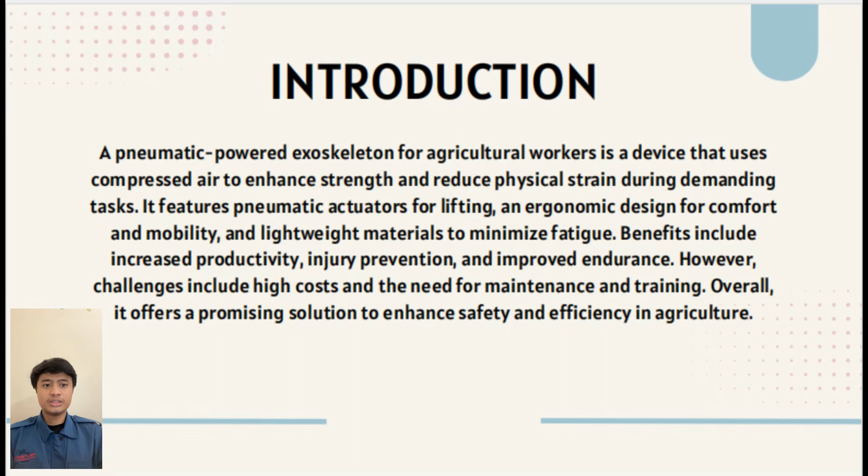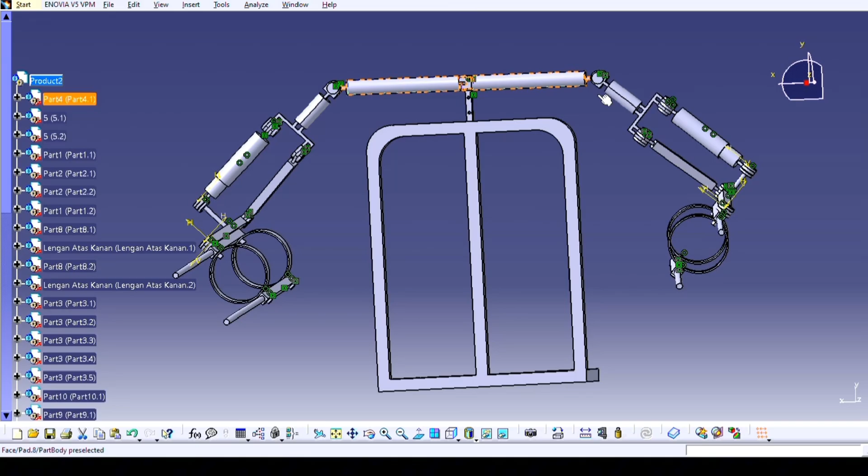Now I want to explain about this pneumatic exoskeleton for the hand. The first part is the top frame, which is the main frame, like this. This is the main frame, and then the second part is this.

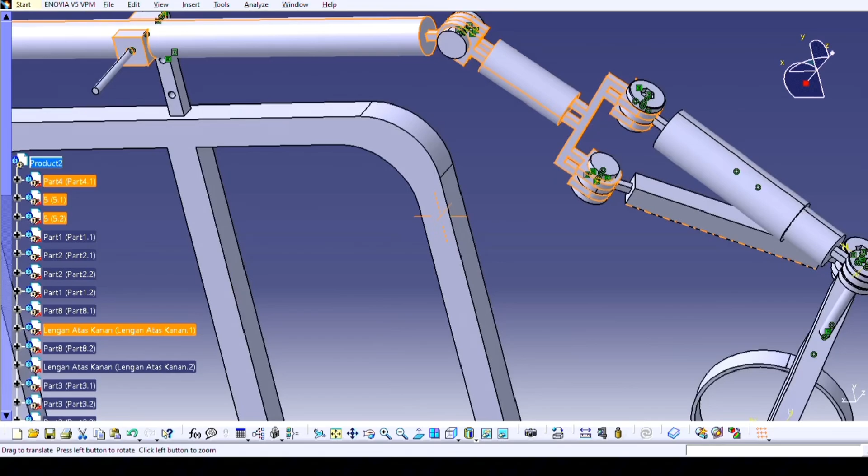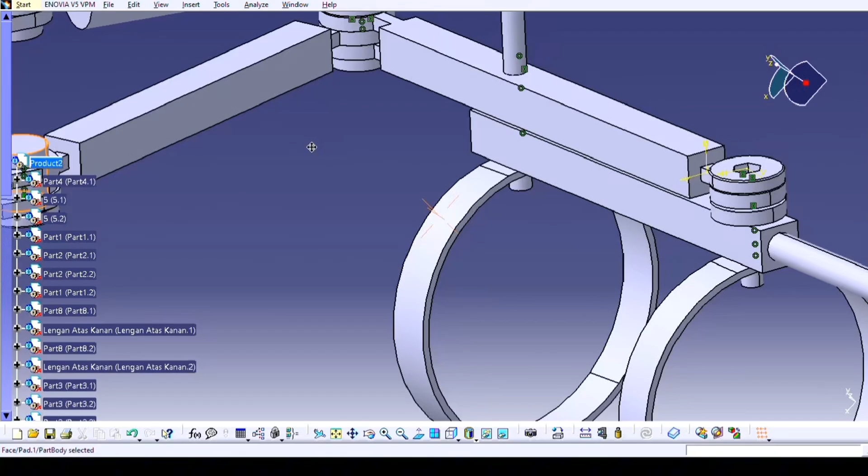This part is used for connecting the piston and the hand frame, and then we continue to the piston. This is the piston, and this is the hand frame, and it connects with a pin. Every part will be connected with a pin, and then from the piston it connects to the frame and then to the hand. This is the place for your hand.

I think the right and left are the same design, so I don't need to explain again. And then, for this, this is the spear. It's used to hit the palm oil.

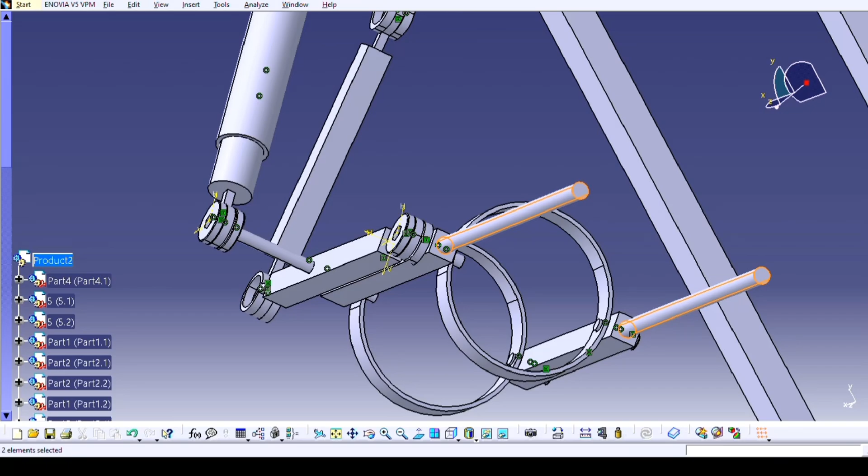In the back we have the place for your pneumatic system, like the compressor, the valve, and the others. And you can adjust the height of the frame here.

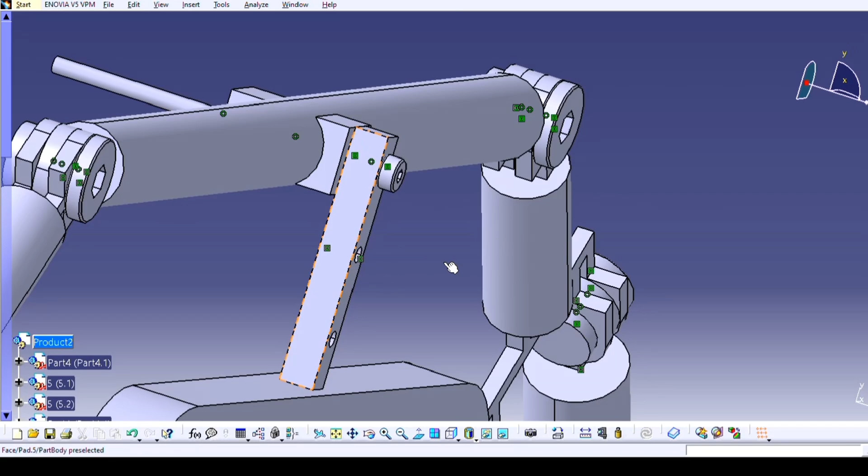So the mechanism is: when you hit the palm oil, you can press the button, so the button will send the piston up. And when you click the button again, it will move the piston to the strike position for the frame on your hand.

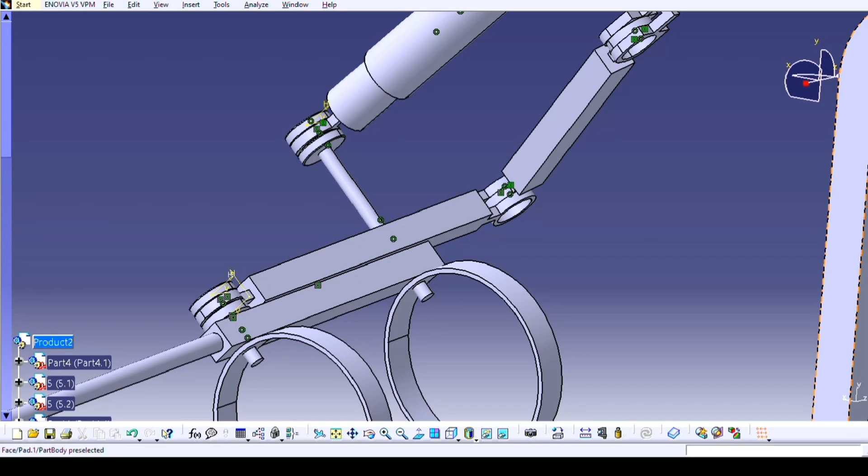I think this can make it easier for the palm oil farmer if you use a wheelbarrow. And it can be even easier if you use maybe a conveyor to bring the palm oil to the truck, so I think it can be more effective if you use a belt here.

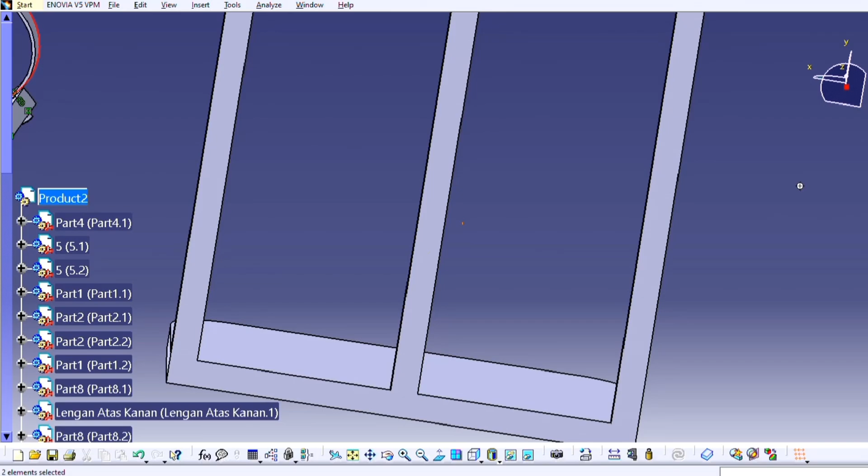And the left hand too, because it can adjust to the size of your hand, so I think it can be more effective.

And then maybe we can put a belt here too, because it can bind your body, and it can adjust to the size of your body. Okay, that's all for my explanation.

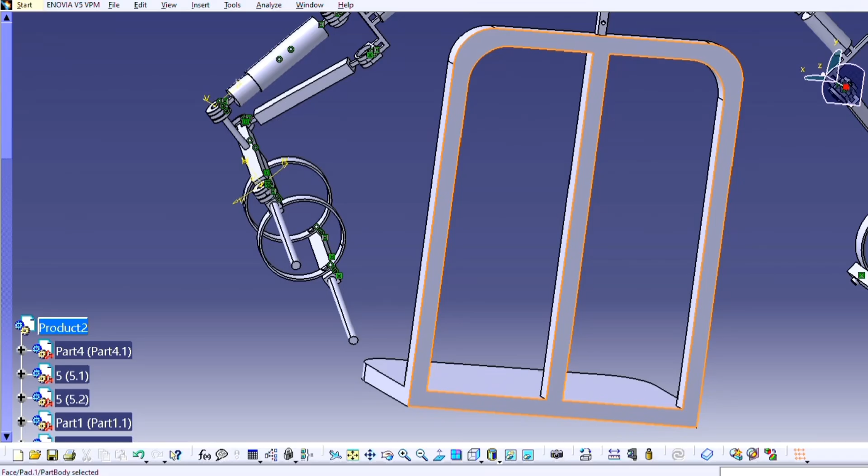Okay, this is the frame of the exoskeleton for the foot. Previously, I want to say sorry because I only drew the left frame, because for the right side, I think it's the same as the design of this left foot frame.

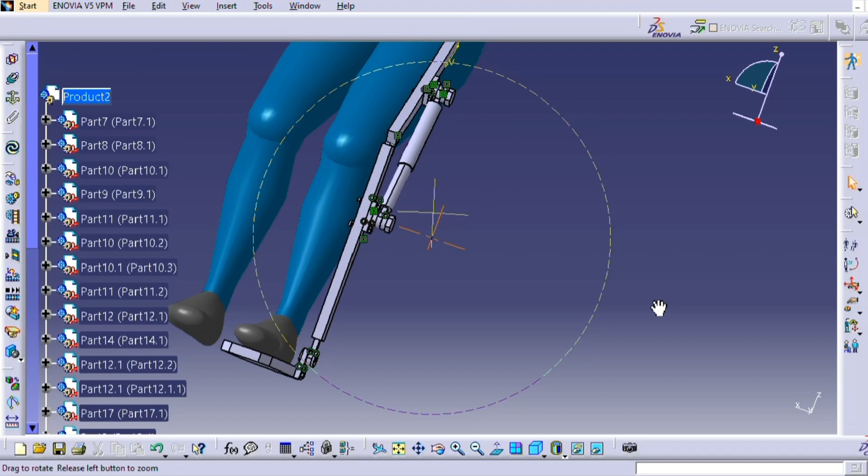Here we can see that there is one piston in addition to the frame that is useful for providing force and pressure so that the feet can support the body to lift oil palm.

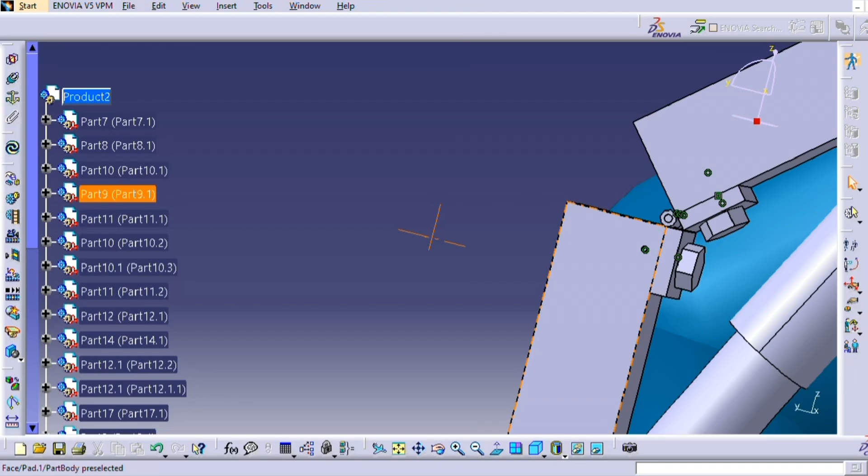Now we can focus on this part. This is a hinge, or we can say 'engsel' in Indonesian. This is used to connect objects so that they can rotate or move relative to each other. For this mechanism, it may move up and down.

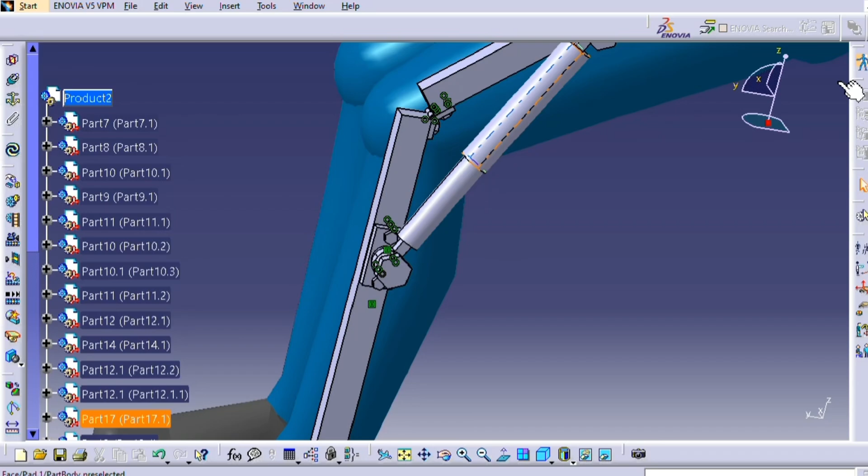We can see that there are so many pins and bolts here. This function is needed so you can separate it. There's a part for uniting, to unite separate objects into one unit, but it can still be separated again easily.

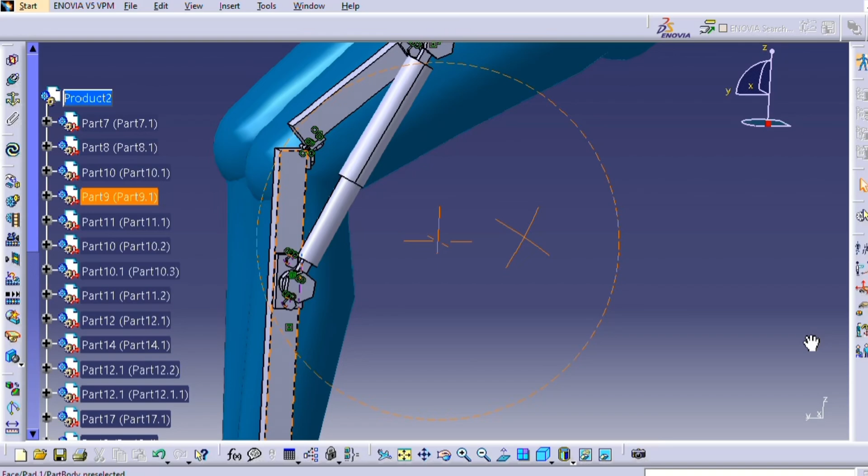Maybe the lecturer will ask if this framework is floating. Actually, what I want is that there is a belt that binds the feet with the frame, so it will be more safe, because the belt will unite your leg and the frame so they will not separate, so that will be more safe. That's why I recommend using a belt.

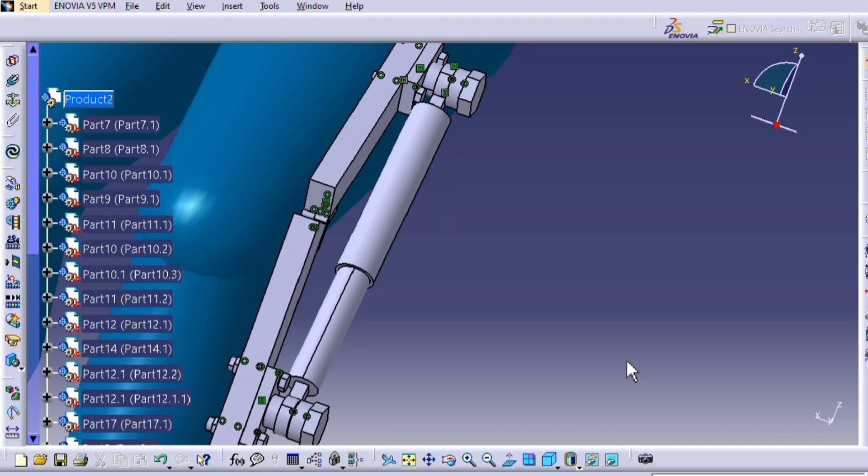Okay, I think that's all I can explain about the leg frame. Okay guys, thank you for the time and the attention. See you guys, bye bye.

So the next part is ergonomics in the design of an exoskeleton for lifting oil bundles. When designing an exoskeleton specifically for lifting oil bundles, ergonomic principles are crucial to ensure that the device enhances user comfort, efficiency, and safety. Number 1, user-centered design.

Anthropometric consideration: the exoskeleton must accommodate various body shapes and sizes. Measurement of the target user population ensures that the device fits comfortably and allows for natural movement. Adjustability: features such as adjustable straps, customizable frames, and modular components allow users to tailor the exoskeleton to their unique body dimensions and preferences.

Number 2, natural movement facilitation. Joint alignment: the design should promote proper alignment of joints, mimicking natural body mechanics. This helps prevent strain and discomfort during lifting motion. Range of motion: the exoskeleton should allow full mobility without restricting user movement, enabling them to bend, twist, and reach as needed while lifting.

Number 3, weight distribution. Load management.

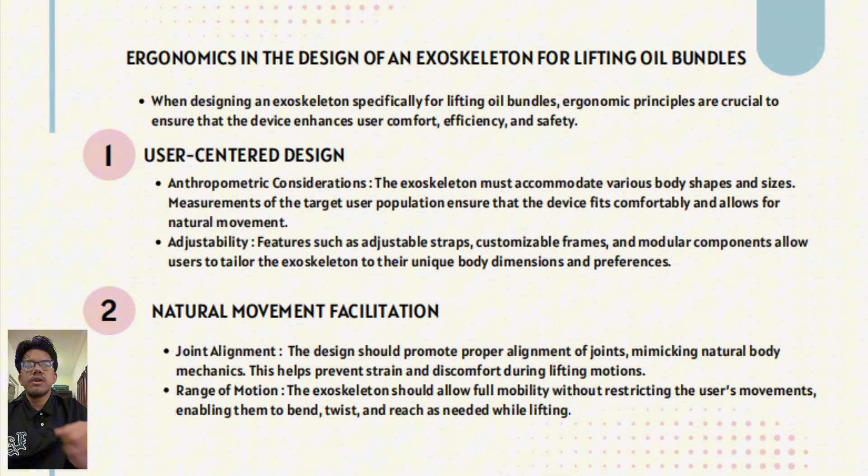An effective exoskeleton redistributes the weight of the load from the arms and back to the legs and hips, which are stronger muscle groups. This alleviates pressure on vulnerable areas, reducing fatigue and injury risk.

Balance and stability: the design should enhance stability, ensuring that the user maintains balance while lifting heavy items. This can be achieved through a lower center of gravity and a wide support base.

Number 4, comfort features: padding and material. High quality padding and breathable material improve comfort during extended use. This feature helps prevent chafing and pressure points that can lead to discomfort.

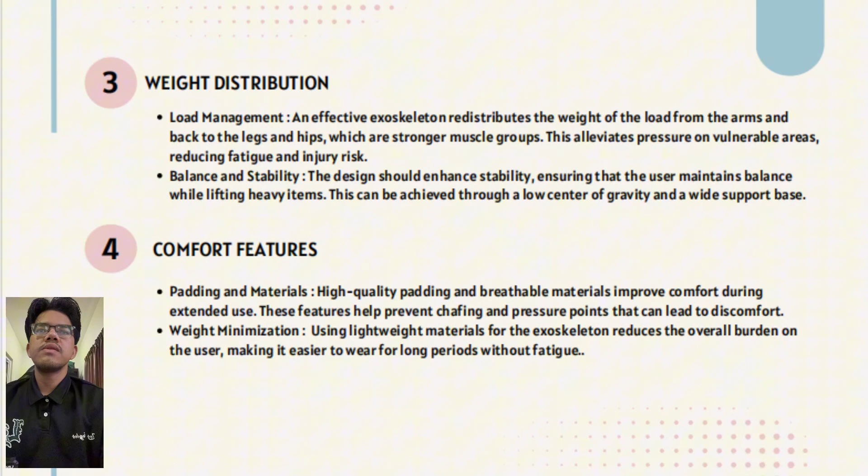Weight minimization: using lightweight material for the exoskeleton reduces the overall burden on the user, making it easier to wear for a long period without fatigue.

Functionality in the design of an exoskeleton for lifting oil bundles. Load bearing capacity and structural integrity: the exoskeleton must support significant weight, ensuring durability under the load of oil bundles. Weight distribution: a well-designed load distribution system reduces strain on the user's body.

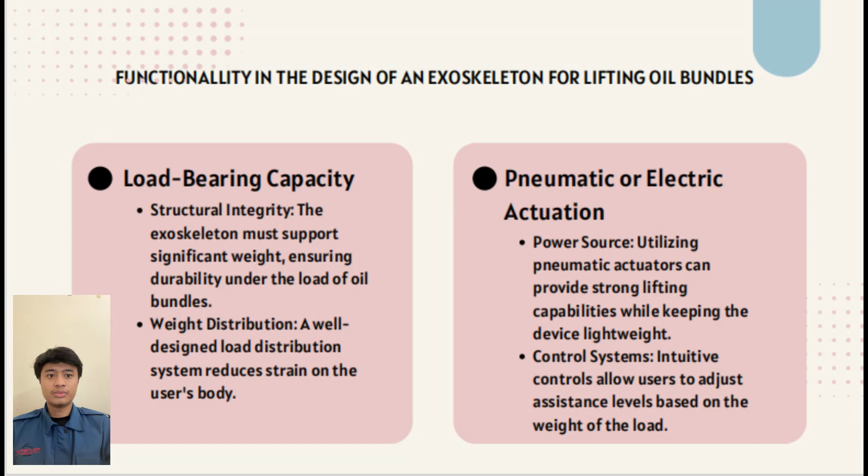Pneumatic or electric actuation power source: utilizing pneumatic actuators can provide strong lifting capabilities while keeping the device lightweight. Control system: intuitive control allows the user to adjust assistance level based on the weight of the load.

Ergonomics: adjustable fit. The exoskeleton should be customizable to fit various body types, ensuring comfort during prolonged use. Natural movement: it should allow for natural body movement to minimize fatigue and enhance user efficiency.

Safety features: emergency stop mechanism. An easily accessible stop feature ensures user safety during operation. Sensor integration: sensors can monitor load, weight, and body movement, preventing over-exertion or misuse.

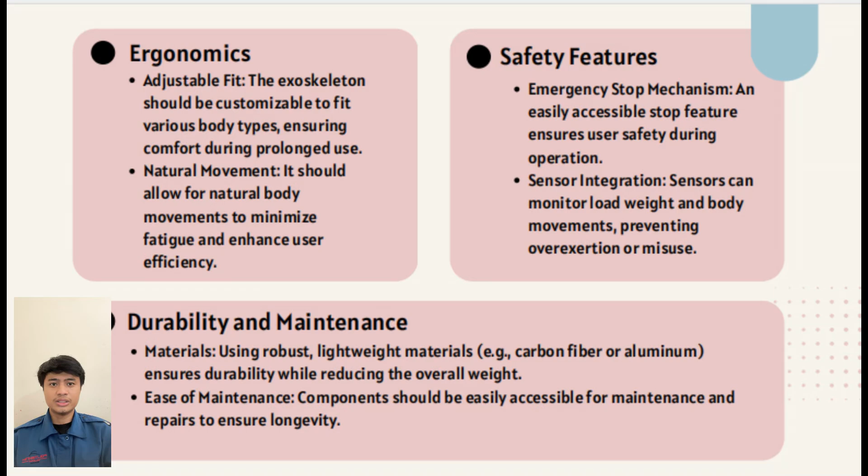Durability and maintenance. Material: using robust, lightweight materials like carbon fiber or aluminum ensures durability while reducing overall weight. Ease of maintenance: components should be easily accessible for maintenance and repair to ensure longevity.

For safety, in designing a pneumatic powered exoskeleton for lifting heavy loads like oil bundles, the safety factor is critical, measured as the ratio between the maximum load the system can handle and the expected load. Key considerations include load assessment, selecting material that can withstand at least 200 to 300 kg if the maximum load is 100 kg, and ensuring the reliability of pneumatic components with a safety factor of 1.5 to 2.

The design of joints and actuators should accommodate peak loads, and safety features for the user, including an emergency shut-off system, must be incorporated. Rough testing is necessary to validate safety under real-world conditions, ensuring the exoskeleton operates safely and minimizes risk to the user.

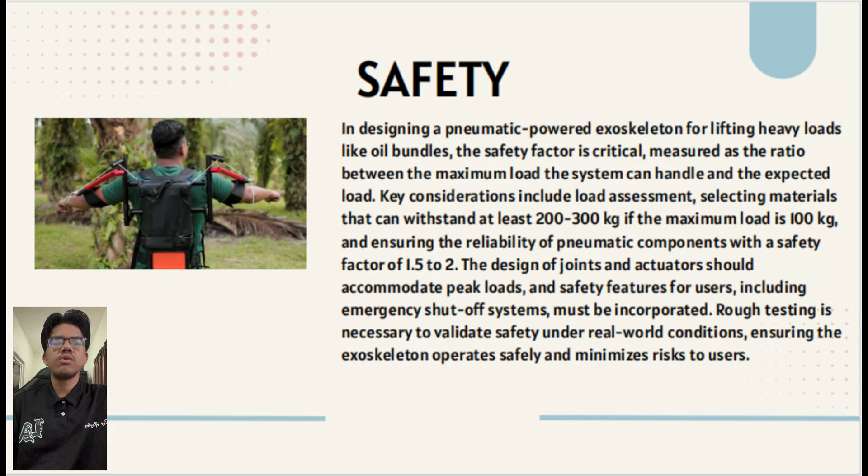In conclusion, a pneumatic powered exoskeleton designed specifically for agriculture workers, particularly oil palm workers, offers significant advantages in enhancing productivity, reducing physical strain, and improving overall safety.

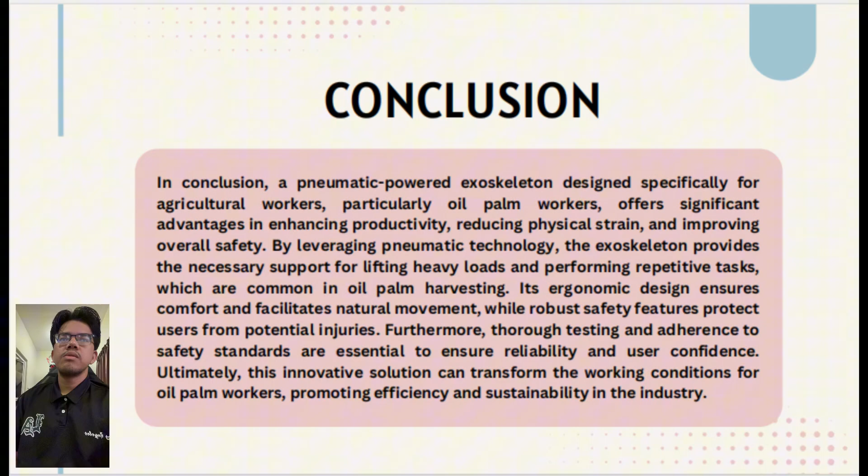By leveraging pneumatic technology, the exoskeleton provides the necessary support for lifting heavy loads and performing repetitive tasks, which are common in oil palm harvesting. Its ergonomic design ensures comfort and facilitates natural movement, while robust safety features protect users from potential injuries.

Furthermore, thorough testing and adherence to safety standards are essential to ensure reliability and user confidence. Ultimately, this innovative solution can improve the working conditions for oil palm workers, promoting efficiency and sustainability in the industry.

So now I will explain the pneumatic fluid sim. The first is the compressor. The compressor is responsible for drawing in air from the environment and compressing it into high pressure air. This compressed air is then stored in a tank before being used in the pneumatic system.

After the compressor, it will send air to the air service unit. The air service unit consists of several components that prepare and process the compressed air before it is delivered to the system. Then from the air service unit, it will send to all the valves: V1, V2, V3, V4, and V5.

For the mechanism, from the air service unit it will send to V1. V1 is like a button, it has a lever, so V1 is a lever. The lever is like a button, a tombol. So when you push the button, it will move the piston forward, and when you click the button again, it will move the piston backward.

Then from V1, it will send to V2 and V3. V2 and V3 are for controlling the forward piston. Then from V2 and V3, it will send to X1 and X3 - the X1, X2, X3, X4. These X valves are for controlling the speed of the piston.

This is a one-way flow control valve. Then from the X valves, it will send to the pistons, named P1 and P2.

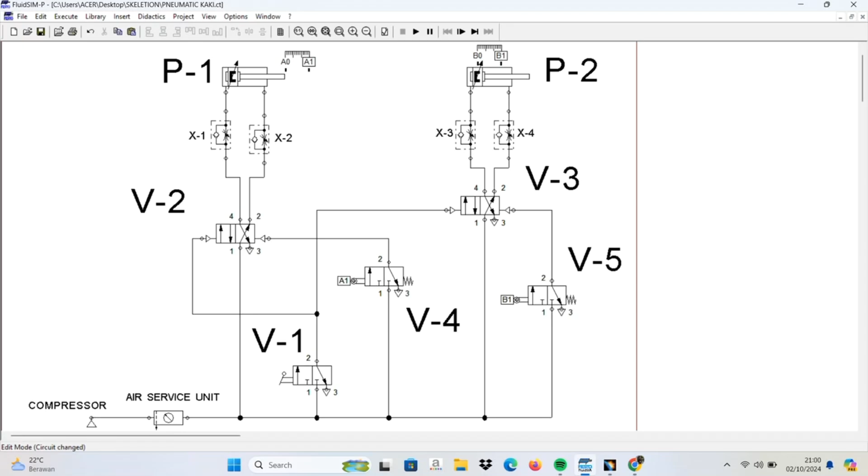And for V4 and V5, these are for controlling the piston to go backward. So if you want the piston to go backward, you can control it using V4 and V5.